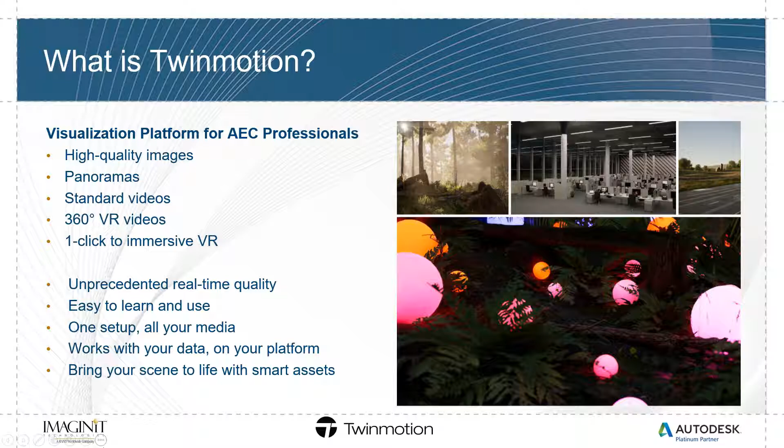This is a relatively formal presentation, but since we have an open mic, please stop at any time—we have the time to make this a little more interactive as a demonstration. Before I start the demonstration, let me show you a quick video our team put together that encapsulates a lot of the features packed inside of Twinmotion. This is the data set I'm going to use as a backdrop for the presentation.

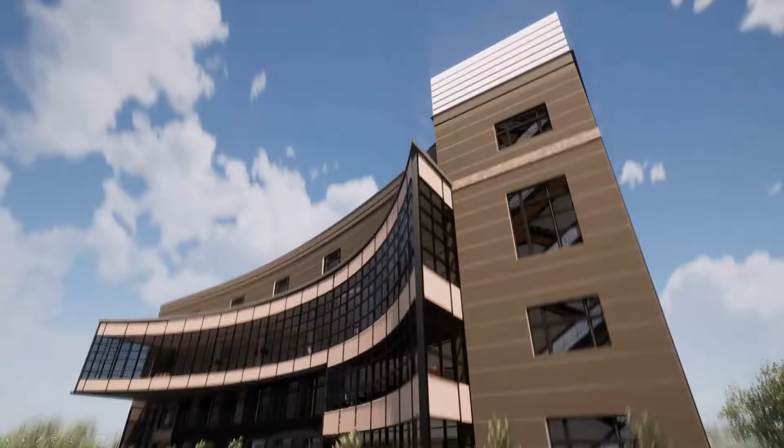Again, very easy to use. We can have animated characters here—there's an extensive library of characters, not just people, but animals and a variety of other animated features. Camera capabilities are pretty standard: panning, zooming. We have time of day settings where we can go from day to night, and there are a lot of lighting features. You can see lighting in a parking lot and around the building.

There's a lot of lighting objects included with the package. Some fun things you can see here: as we pan, there's what's called the northing offset, so you can change it and animate the moon and sun going across the sky. As we translate and move into the interior of the building, you'll see other features like particle animation—you can add smoke to this burning laptop. There's water, and we have character paths, so we can add paths not only for characters but also vehicles and custom paths.

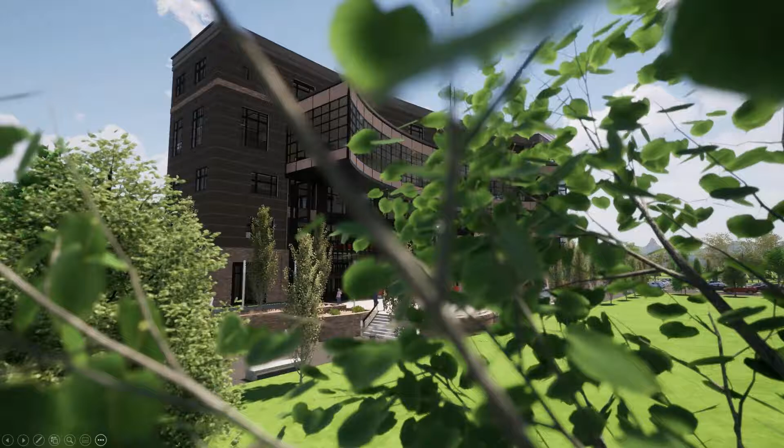And there are camera features here, like depth of field, where we can change the focal point, open up the iris. You can focus in on different things.

And then, as I talked about earlier, there's vehicle paths. You can create your own custom paths, change the seasons from summer, fall to winter, and adjust weather from a stormy, rainy day to a snowy blizzard day. As things get snowy, cars accumulate snow, and we can show the age and growth of plants and such on the site.

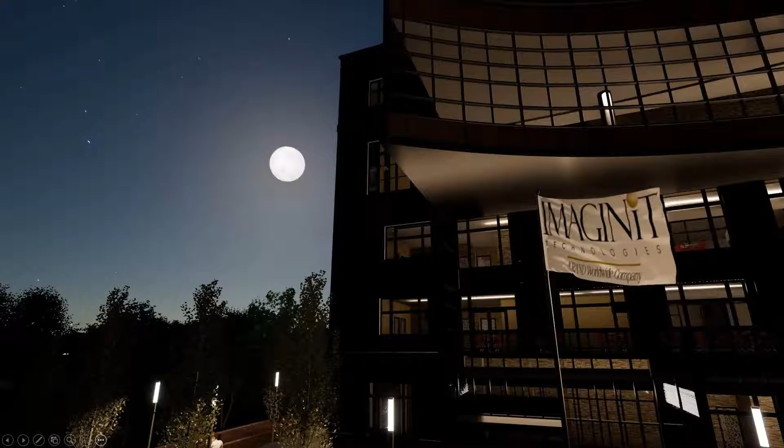Night scenes, with some more characters in there with flying birds. Nighttime scene with lights. So this is just to give you a broad stroke view of what we can do inside of Twinmotion.

So let me get out of this PowerPoint for a moment, and let's start from the beginning of opening up a Revit file. This is a Revit Users Group, so you guys are all familiar with Revit. I have the model we're using as the backdrop for the Twinmotion presentation. You can see it's a pretty basic model, fairly well vetted out with interior information, building skin, and a little bit of a simple site.

But the way we were able to extract this data out of Revit and bring it into Twinmotion is using a plugin from Twinmotion. If you look on the top with your tabs, there's a Twinmotion plugin for the various versions. I happen to be using 2020. I don't know how far back they go, maybe 18, 19, 20, and then there's a 21 version of the plugin. But it's a very simple interface.

So there are three panel buttons here. There's a See in Twinmotion, which is basically a direct link to Twinmotion, so I can quickly take this model and export it right into Twinmotion. The difference between that and doing a hard export to an FBX file, which is this button here, is that it's a one-directional way of looking at your model and vetting it out inside Twinmotion to get a sense of what your model might look like.

So what I mean is I can be in Revit, export this out into the See in Twinmotion, look at the model and the various views inside Twinmotion, then make some adjustments back into Revit, and re-export it back to Twinmotion. The only thing is that it is not a bi-directional change.

If you're wanting to add certain assets, objects, and materials, you can bring those in via FBX, and that's probably the cleanest method. Realizing that, out of Revit you can do a quick export to FBX, but it doesn't give you the broad spectrum of what you can do with the true export from the Twinmotion plugin. You can bring that FBX file right out of Revit into Twinmotion, and it will behave similar to the Twinmotion export, just not as rich. But to answer your question, yes, you can bring any FBX file into Twinmotion.

Upon deployment of Twinmotion, you're presented with this welcome screen, which gives you a quick broad stroke about how to navigate around Twinmotion. You can change your navigation mode to mimic other applications if you prefer to navigate like the Revit interface, or just keep it at Twinmotion. There's also a link right here to the Twinmotion Epic Games website so you can download plugins. Sometimes I'd caution about getting rid of this welcome screen, because if you set it to Revit mode and then wanted to go back to Twinmotion, I think you'd have to reinstall the program. A little annoying, but just a tip.

This is Jason Harwell, I don't mean to interrupt. Can you repeat that last little part there?

On the welcome screen, there's the ability to change your navigation mode to mimic Revit or SketchUp or whatever it might be. But if you kill the box and say you don't want it to pop up anymore, it'll stick on that format. It's not a game changer, but if you prefer to go back to the other navigation mode, you're kind of stuck there, and you'd probably have to reinstall the program. You can't adjust that from preferences anywhere that I've found. I could be mistaken, but I'll shelve that for now—there's probably a way around it. I generally just keep that there and quickly X out of it.

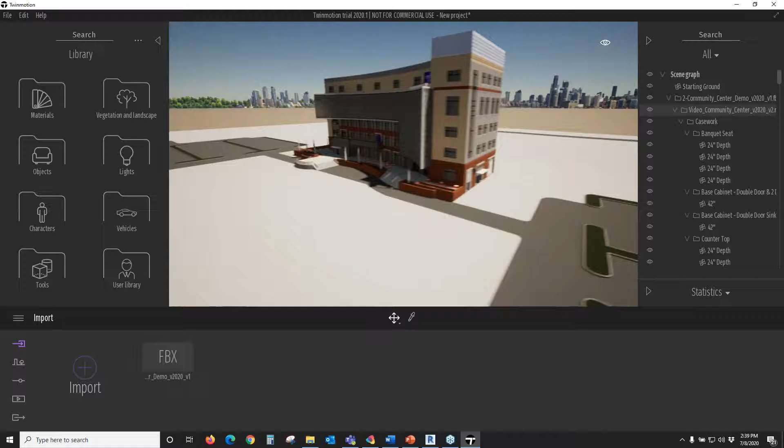So if you look at it here, it's relatively raw. There's not a whole lot going on. The materials are pretty poor, but we'll get into those in just a minute. Navigating around the model is quite simple - I'm just holding my middle mouse button to kind of pan around, I can use my wheel to zoom in, and I can hold shift and just kind of orbit around things.

And again, I can start zooming in, or I can hit my arrow and start walking inside the model here a little bit and going around things. I actually wanted to go to a specific area in this model, and I could try to navigate through this and try to find it.

But again, the easiest way for me to do this is to use my scene graph. I know there's a billiards table that I want to go to, so if I just use my search and type in 'bill' and select that, hit my F key, it takes me right to that location that I want to be in. Pretty easy. I really like this scene graph because it allows me to navigate around my model quite easily.

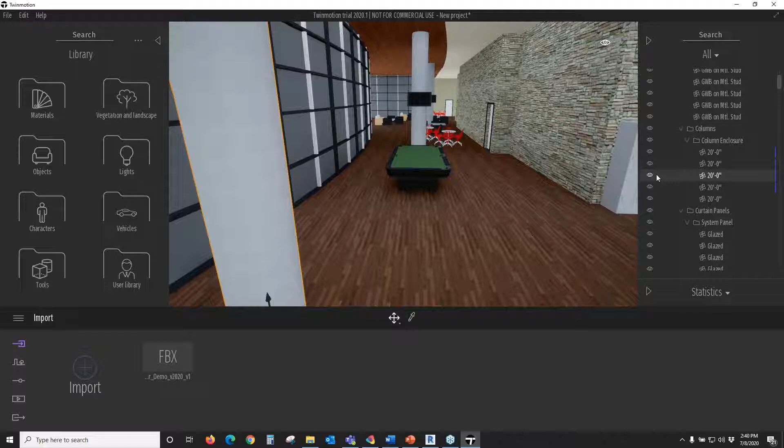That's awesome, yeah, it's very easy to use. You don't even really need to know what the object is. If I just click on it, it'll tell me inside my scene graph it's this 20-foot column, and I can turn that off right here. So again, it's just like object styles or layers. You can turn things on and off, but it's also a quick way to navigate inside your model and move to certain things.

So that scene graph you were calling it, does that work in a hierarchy, and where's it pulling that information? Is it the Revit category, Revit type, and then family, and then instance? Yes. So these are all the various... it's working exactly the same as Navisworks. Exactly.

It's good and bad in that it's very deep because there's a lot of stuff in here, but the good news is that I can search, or I can look at things by various categories here. I'll show you this as we go deeper into the demo. It doesn't matter where I'm at in my scene graph, I can always find stuff. Yeah, the search is critical and great. Oh yeah, thank you, this is wonderful, I'm using it all the time.

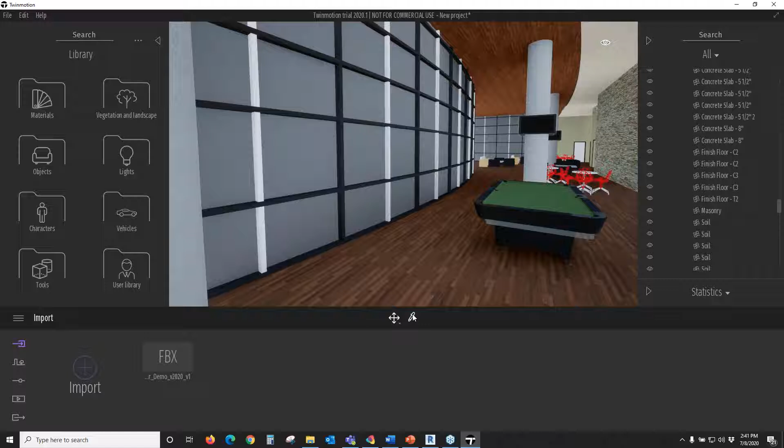It'll make more sense as I move along further. So I'm inside the scene here, and one of the first things I want to show you is how to manipulate and change materials. You can see the materials brought in from Revit are okay, they're not terrible, but I'd like to change them, especially this window. If I hit my little eyedropper here, it's my material picker, and I click on it, it tells me it's this glass, cast gray, and it tells me certain parameters about it. I can change its color, its reflectivity, its scale, and so on.

But I don't want that, so I'm going to go to my materials library and select a different kind of glass. This is the default library that comes inside Twinmotion. Again, you're not married to this, you can add to it and manipulate any of these materials on your own. But out of the box it's quite extensive and pretty deep. You can see all the various glass types in here, a lot of them have little bump maps, some are shaded and such. I'm going to try to find this tinted, dark tinted glass, select it, and just drag it on top of that material. So it's that easy to change that material from gray to something better.

It's an actual glass now, so since it's on my windows here, I have control over changing it. Maybe I want it a little darker and more opaque, you can change that. There's certain things here - this weather one's kind of cool because it'll show raindrops on your window if you have weather on. You can turn that off; I'll show you weather when we go outside a bit further. So again, very easy to add materials to the window there.

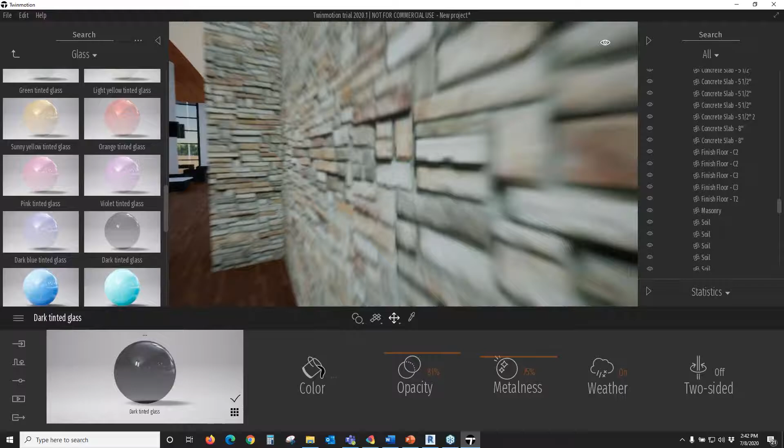If I pan over here to this wall, again this is the Revit material that was applied. It's not terribly bad, but I think we can do better - you can see it's pretty flat, it doesn't show any kind of bumping material. So let's change that. Let me use my material picker again, select the material, and it tells me it's this stone natural soldier. Let me go back and find a different stone.

Again, pretty extensive library of stuff here, so maybe this one. I'll drag that on, putting that stone on there. If you look at it, it's a little nicer now - I can see the relief in the grout from the stone. You can change the scale here, make it bigger or smaller. Quite simple, just dragging that material onto the surface makes it that easy. But one thing I really like about Twinmotion is that I can isolate the application of the material, even though this is one common wall type.

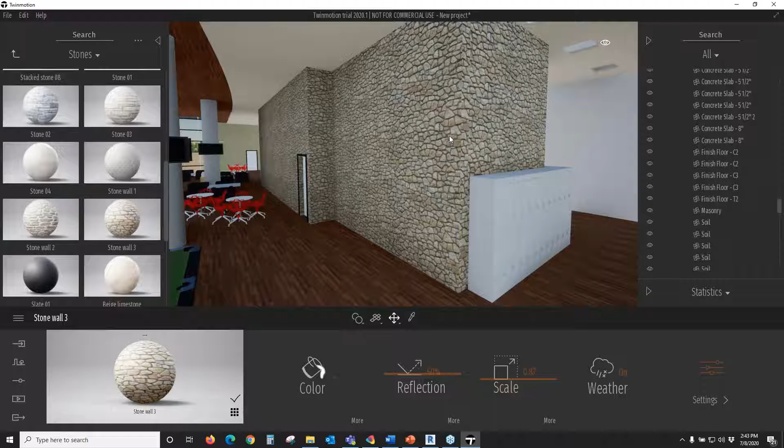I know that a lot of times you're kind of stuck with applying a material to a certain wall type because it is categorized by that. But I can isolate a piece of that wall by using apply to object. So if I want to change a piece of that wall to something else, let me find a different wall covering, maybe this plaster coating. I can just drag it onto that one wall now. So now it's not changing the material for all the objects that are the same type.

I can isolate that one wall and place that wall material just on this one wall here. I find that to be quite useful because previously on using some apps, you're always having to change its layer, its object style, and it becomes a little bit annoying to isolate certain things, when it's just easy right here. I can just pick that object and change it, making it different than the rest.

Some of the other things we can do about materials inside of Twinmotion: you can manipulate its color, maybe make this a little bit darker, change its reflectivity, adjust its scale, make it a little bit bigger, and the bump map. But one of the fun things that Twinmotion provides is this concept of grunge.

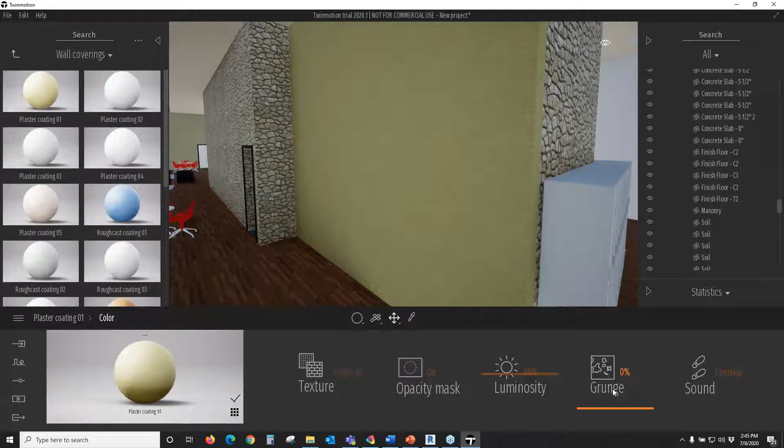If I go to more, you can see this grunge tool here. As I move my grunge up, you can start seeing that the material starts to weather or look a little bit older. So you can add more realism to your materials by showing what this is going to look like in, say, 10 years. These are kinds of things you can animate too, showing how this might look in X amount of years, the weathering of this particular material. It's just a neat, fun tool to have for your materials.

So now that we have some materials applied, you get the idea there. It's pretty simple. I can start building out this environment a little bit deeper.

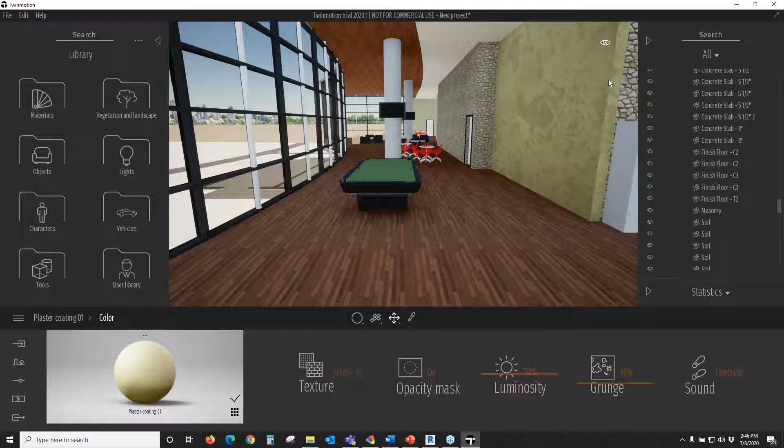If I go into my library... oh, go ahead. It looks like it moved around the corner a little bit. Is that something you can control? Right here, this corner here. Well, it just happens to be that that's just the extent of that object there. It's kind of this thick object.

I could put the same material on this wall and it will kind of blend. Is that what you're asking? I can't control that; it depends on the way the object is joined in Revit. So if you did a miter join there... right, this happens to be just kind of a butt joint there. So yeah, it's just based on the geometry. So you're correct.

Can you talk a little bit about the opacity mask feature right there? Maybe you don't necessarily have to demo it, but just talk about how that works. What we would see is, if I'm not mistaken, another image that gets mapped on top of it that we can set the opacity of. Yeah, absolutely. And then I can show you there are some other tools in here where you can set the sort and place things on top of one another—I'll show you that in just a minute. But before I get to that, I just wanted to build this scene out a little further, and I'll show you that shortly.

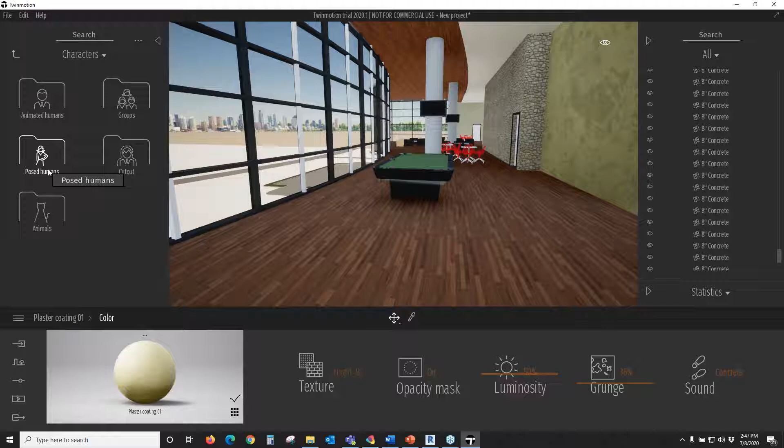So if we go back to the library, I talked about characters. There's a fairly extensive character library here: we have animated humans, groups of people, kind of posed humans which are basically like RPC people that are two-dimensional, and we have animals and some cutouts as well. In the animated human library, there's a plethora of different people that you can select and choose.

So if I want to build out my scene here, I just grab Emily and drop her into the scene. When she's in the scene, you have this little gizmo attached to her, so I can grab her and rotate her around, maybe move her over a little bit. They are animated, so I can change her from an idle to maybe drinking, maybe phoning, something like that. There are a variety of things you can do with each one of these people, and they're all kind of random.

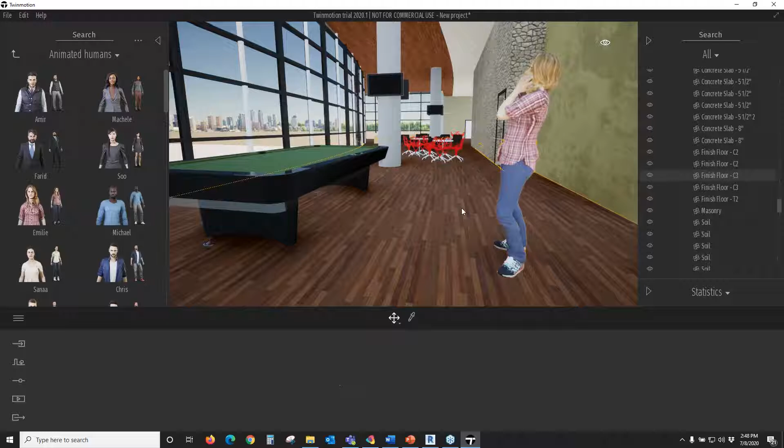So I'm gonna leave Emilie here for now. Move her out of the way.

Not only can you have individuals, you can start populating with a variety of different individual people here. I can put in groups of people as well. So if I grab these group of 3 here and drag them in, I'll put that group here, maybe rotate them a little bit. So you can see I have this group of 3. If I grab another group of 3 and place them in, you can see that it randomizes it, so it's not the same group of 3. That's a nice feature, because you obviously don't want the same group of 3 people in your scene all the time. So every time you're grabbing a variety of these different groups, it's going to randomize them and put a bunch of different people in your scene for you. Pretty simple to build out your scene by grabbing these various types of groups and people.

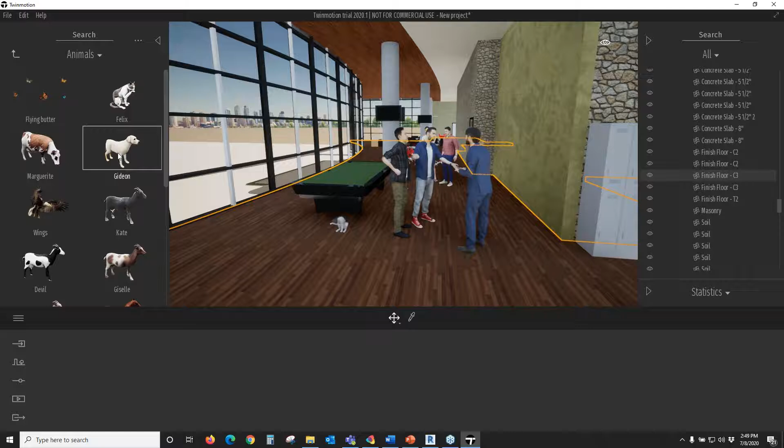Not only do you have people, but we have animals. I like Felix because I'm a cat person, so I'm gonna put Felix underneath the pool table. We've got dogs and chickens and all kinds of crazy stuff out here. Put a dog in here, maybe there's an office dog. Move him out of the way.

Again, like I said earlier, the product is very fun to use. There's a lot of interesting things you can do to build out your scene. There's butterflies, and I showed you on the video. There's birds flying in the sky. There's fish that you can add to a pond or water if you need to. So a lot of fun features here.

I talked earlier about how you can kind of mask things on one another. Twinmotion has these decals, and I'll show you how to do some of these things on the outside, but I'll grab some of these fun ones here. Maybe I'll put this hopscotch decal on the floor here. Just like a material, I can change its size, I can change its opacity. Maybe you can see through it, right? So there's things you can do about that.

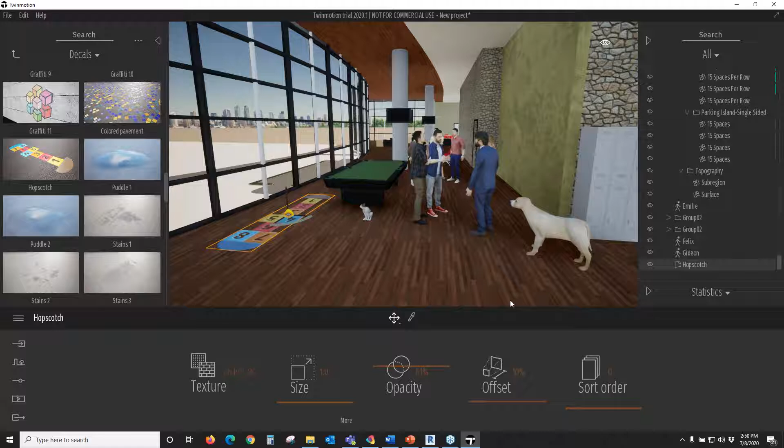This sort order will come in handy when I put something outside. I'll show you how that works, but it's basically laying one on top of another, so you can sort them by what's the priority on top of one another. I can also grab maybe this graffiti here, and again, as I'm hovering over any of these surfaces, you can see that it places it out there for you.

A question about the decals? Do those only apply to flat surfaces? Nope, I can put it around that round column. I mean, it kind of truncates it a little bit, but it doesn't have to be flat. Yeah, it does a little strange thing here, it just kind of didn't wrap it really, it just placed it on that base of that round surface there. It looks like it's on a per-polygon or per-face basis. Yeah, it's kind of a yes/no answer.

So decals are very handy because rather than build out a lot of geometry, I'll show you in a parking lot, you can do the parking striping. You could do that in Revit, you can do it here as well. It really depends on how you want to manage your model and how you want to animate that. So decals, pretty simple. Just like any other object or material, you can change its opacity. You can layer them on top of one another, and again, you can change its sort order.

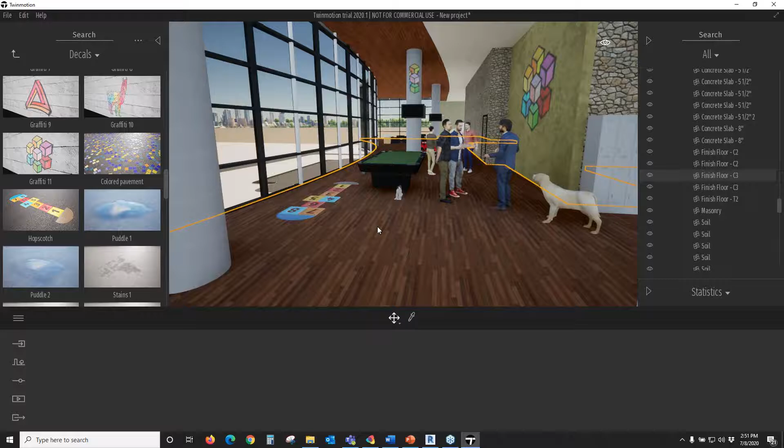Do all of these things you're adding, like decals and character animations, show up in your search, or what did you call this thing on the right here? Yeah, so if I go to decals, as I place them out there, it'll tell me I can manipulate my hopscotch. So anything I add as an asset to my scene, it adds it to my scene graph. This is how I can actually just turn these things off. It can be placed there, but I can turn it off and on, so it's easy to manage those objects inside of Twinmotion.

And how do we adjust the layer stack of those decals again?

I'm sorry, say that again? How do we adjust the stacking order of those decals again? Yes, so in this hopscotch there's a sort order.

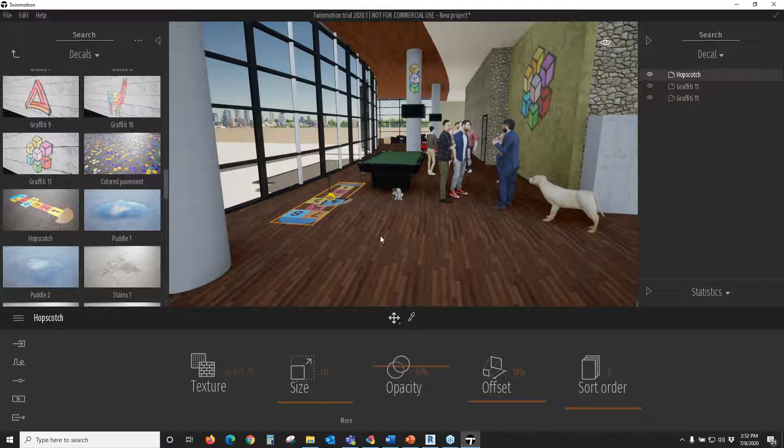I'll show you when I go outside, I'm going to place some things outside and show you how that lays on top of one another. But I can do it right here. I'm going to grab this pavement, this funky colored pavement. You can see it's below the hopscotch decal, but if I change its sort order to 1, it moves on top. So you can change that sort order.

Great, so, yeah, pretty. Oh shoot! I didn't mean to do that. Deleted my floor.

Maybe it's better to do it here. Delete. See how easy that scene graph comes in handy? And by the way, there is an undo, so you can undo if you did something by mistake, like I did by deleting the floor.

How many steps of undo do we get by default, and can that be... I think it's to your last save. So if I save this now, it's gonna kind of refresh it all.

Okay, so moving along here. So we have objects, we have decals, we have people, we have animals. We can also add other things here. Let's go to, maybe I can put a laptop out here.

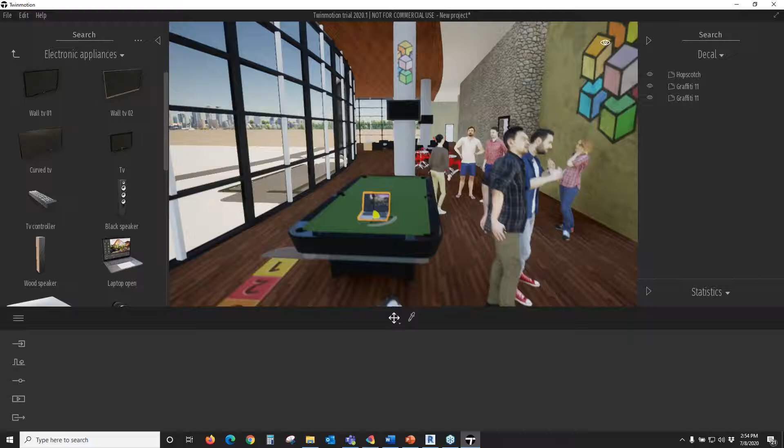In the video you saw that, so we have a laptop here. There are things like I showed you in the video, there are particles, so there's a variety of different things here. There's fire and smoke, you can put this smoke on this laptop so it's kind of burning. So there's a lot of particle kind of animations. There's water, there's colored smoke.

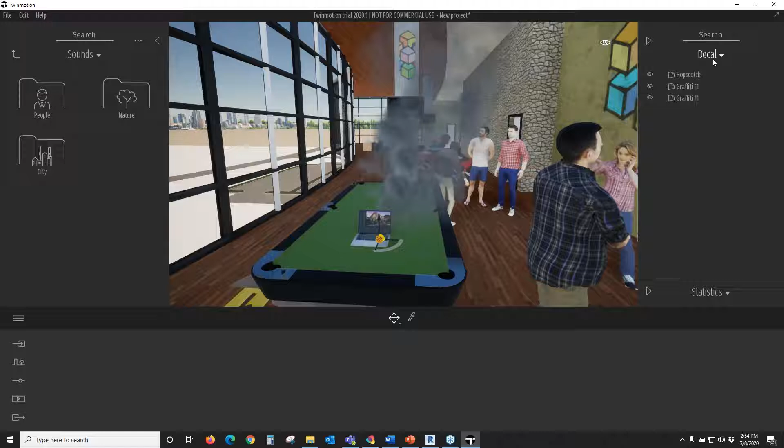Additionally, there's sound, so you can add people sound. Like this, you can't hear it here, but you can add certain kinds of sound, noises like these people are kind of conversing, so sort of like white noise in the background. So you can add a lot of texture to your presentation. That smoke is a particle, so that's a little annoying for me right now, so I'm just going to go ahead and turn it off.

Going back to some of the other objects that we can add in here, let me go to Office and maybe some tables. So I can grab this table, I can bring it in. Again, it's very easy, it's just drag and drop into your scene, very simple.

Maybe I want to add a chair, so I grab this chair, drag it in here. In order for me to copy something, I have the gizmo, I can rotate, move it to make a copy. I could certainly drop another chair in here, but I can copy this by holding my shift key down and dragging over. So now I have an instance or a copy of it.

Some of the other things that you can do with these objects is you can move things, you can scale, you can rotate by using these commands here rather than the gizmo. Additionally, if you need to do something very precise, you can transform things.

So let me get out of this and go to all. If I click on this chair, there are certain things about its position that it's telling me. So if I wanted to precisely move something about this chair, maybe move that to 17, you can start nudging the object a little bit more precisely than eyeballing it here, if that makes sense.

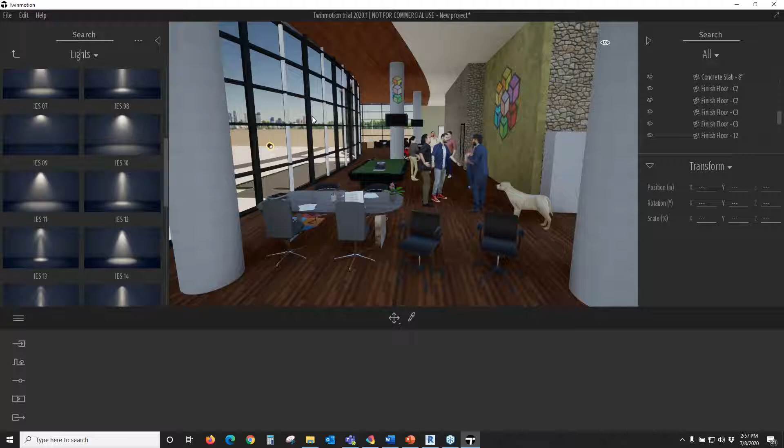I don't know, maybe this one. So I'm going to just put it up here, and once it's placed, you have the ability to change its angle. Maybe I want it to be a little more focused, change its attenuation.

Something like that, I don't know. Change its intensity, move this a little bit over here so it's on the pool table. You can kind of see that shining here.

What really makes this come to life a little bit better is if I go to my eyeball, I can change the time of day, maybe make this night. I can see that light kind of coming alive there a little bit. It's incredibly intense, but you can see how that adds a little bit more texture to your scene.

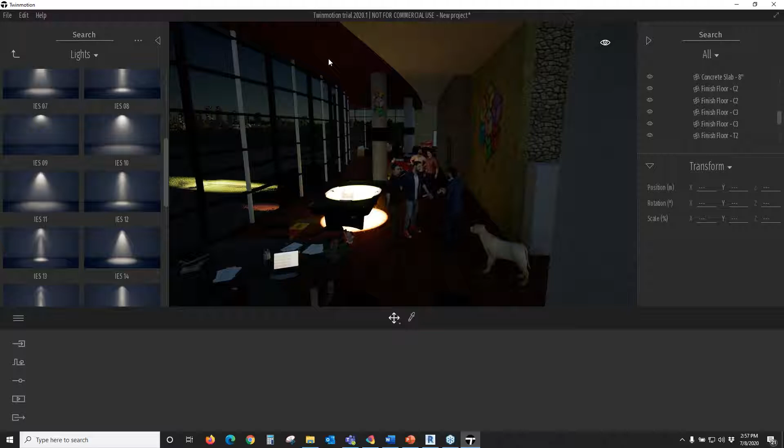I can add another one here, change its angle, and its attenuation, maybe something like that. Right now I have the shadows off, but I can turn the shadows on, and just kind of see the shadows now.

If I go back to my lighting again, this is how I can filter what I want to see. You can see the gizmo for this light is highlighted, but I can go back to the other one, and again change and turn its shadow on. So I have controls over here.

So by the way, these gizmos, these helpers, gizmo helpers, are important for you to manipulate and move the objects. I personally, when I'm working in my scene, don't like to see them, but I know I can always go back to them by just clicking on it, and it highlights that object for me.

But if you always like to have them on, you can go to your preferences and go to appearance, and they're called visual helpers. If I click on this and have visual helpers always on, they're always going to be on in your scene. It's a personal preference, but if you like to have them on at all times, you can. They don't render, but they're there for you so that when you're wanting to manipulate and edit these things, they're always here. For me, I just like to have them off because I know I can always go back to them from my scene graph.

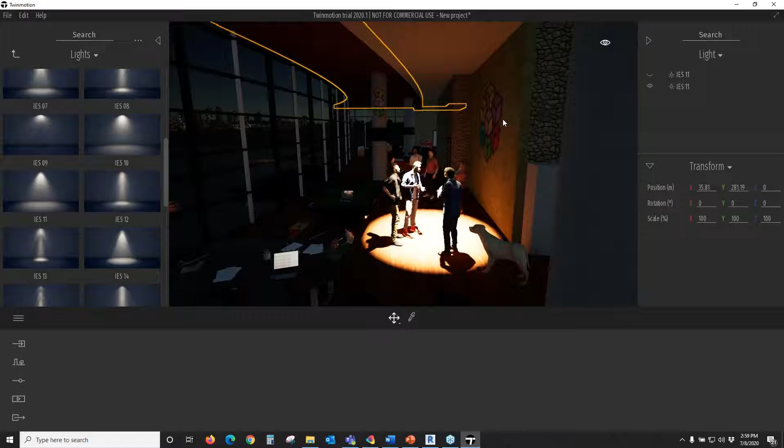Another way to get them back on is by hitting your G key. You hit your G key, they all kind of show up, so now I have the gizmos for all my objects in here. I can hit the G key again and they go away. So just as I showed you with how to import things, there are many ways you can turn all your key features on and off very quickly.

Let's turn this back to a little bit of time of day so we're a little brighter in here. So I will pause here for a second.

Any further questions? I have a question about the lights, this is Bethany. If we had a light that was in the Revit model, and if it had IES data in the light family, would it function the same way as these light objects added through Twinmotion, with all of these options you're showing us, or do they have to be Twinmotion lights to have all of those options? Yeah, unfortunately, they will not come over from Revit. So you'll have to add the light features from Twinmotion into those, even though you had an IES light from Revit. So you're going to actually have to add them in Twinmotion, unfortunately.

There are some other light objects that are loaded with the product. They're not as precise as these IES lights, but there are street lamps and various bollard lights, there's a library full of them. If I go to, oh gosh, like street lights, you can see there's a variety of different lights here, but they're not accurate lights, is what I'm saying. But yeah, to answer your question, no, those lights from Revit do not translate over to Twinmotion.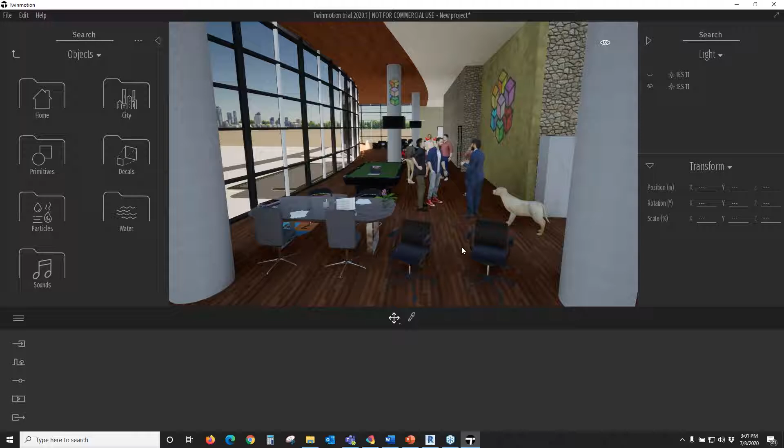No, it's okay, I'm just trying to get a sense of what the workflow would be, because the other question I have is, once you bring in a Revit model, and let's say we do all of this work in Twinmotion modifying materials or adding lights and other entourage elements, if we needed to update the Revit model and brought it in again, do we have to redo that work all over again, or does it have any kind of smart ability to kind of...

Right now there's not a good way to update that model that you're manipulating. I know exactly what you're saying, because I spent a lot of time on that animation where I was building it out and going, oh gosh, I need to add this. And I spent all this time doing materials and all that.

I don't want to say it's a no, but right now I don't see an easy way to do that. I'll research a little further and see if I can find a better answer for you. But unfortunately, you do all your work, and if you wanted to go back to your Revit model and massage it a little bit, it's kind of annoying.

That's why I was talking about this feature called Sync in Twinmotion. This is a great way for you to vet things out before you go full-blown FBX. It's handy for working back and forth between Twinmotion and the model to get a sense of what you really need to do. Once you're comfortable and at a good stopping point with your Revit model, then export it to the FBX file.

One quick question about Sync in Twinmotion: is that an additional plugin that one has to install into Revit, or if you have Twinmotion on your machine, does Revit recognize it? It's part of the Twinmotion plugin, so once you install the plugin, it's included. I'll show you that when we get done here. It's pretty simple, pretty slick.

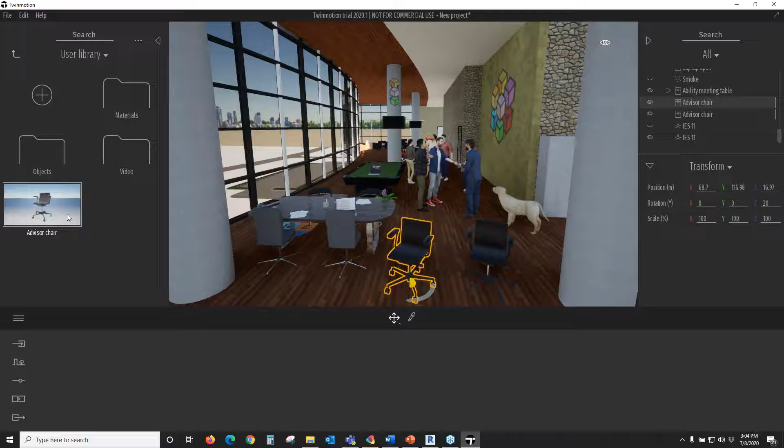For instance, if I wanted to grab this chair and make it part of my library so I can use it for different projects down the road, I just click on the chair and hit these three dots. You can say add to library, and it automatically adds that object to your user library. This library carries over across all your different projects, so you can make a custom library of objects and customized materials, and they're all transferable between any projects you bring into Twinmotion. It's very handy to have, so you might use this chair in a different Revit model down the road.

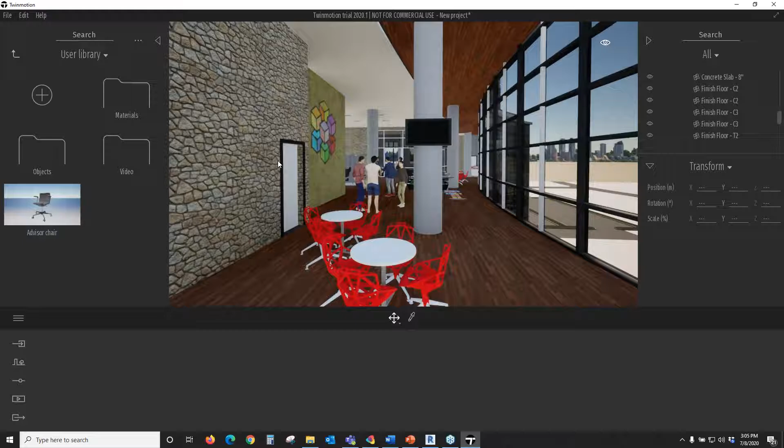Moving around the model is real simple. I can start walking through this. I'll turn my speed down to 1, which is walking mode, and you can walk through to get a sense of your space. I'm just holding down my arrow key on the keyboard with 1 selected. If I put 2, it speeds up — that's called bicycle speed. So you can easily walk through your space and look at what's going on very fast. Walkthroughs in Twinmotion are pretty simple.

Let's go outside and work on some of the stuff out here, showing some of the landscaping we can do. When I brought this model in, the exterior was pretty generic and raw. These trees here are RPC trees, so they don't come over very well. But what we can do quickly is transform those into Twinmotion trees. If I select one, you can see it's this Italian cypress.

So what I want to do is grab all of them. Just like anything else, you hold shift and select to get all those trees. I'm going to select all of them and replace those objects. I go to my user library and pick some trees — I'll replace them with maybe this Lombardy poplar. Now that they're selected, I go ahead and replace them. It's pretty simple.

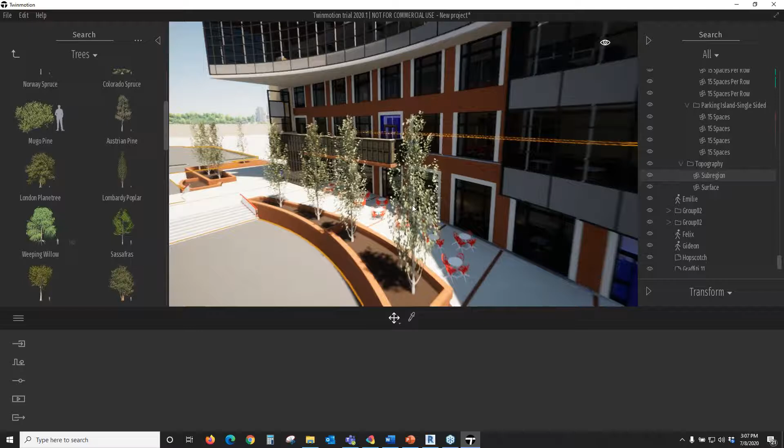So you can see that they're pretty big. I can change the age of those and bring those down to something that's a little bit more reasonable. And those look a whole lot nicer now. They're not the funky little RPC trees. Now they actually have leaves on them. And you can see that if I had a little bit of wind, you can see them kind of fluttering there in the wind. So it's a much more realistic kind of looking tree inside my scene here.

Some of the other tools that I have, let me manipulate over to this planter bed and get in a little closer. So oftentimes I can drag and drop trees into my scene like this. Pretty simple. I can just do one by one, or I can grab a whole bunch and kind of place them in there.

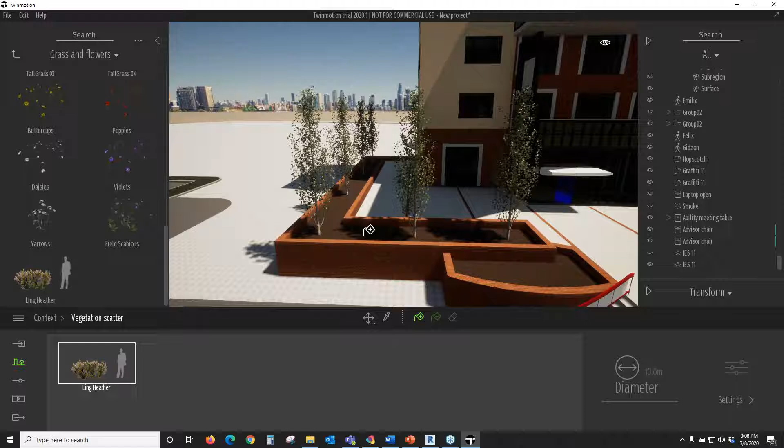One of the things that we can do is what's called a vegetation scatter. So if I go to vegetation scatter, I'm going to grab some vegetation. I grab this ling heather, put that into my drop area here, select it, and paint this object here. You can see how quickly that painted that object. You can see that it bled over a little bit just because of the scale of that object, but I can go in here and erase that. Let me change my eraser down a little bit smaller, something like that. Now I can just hover over this and clean that up. But the idea here is I can quickly build out this flower bed very quickly by doing that vegetation scatter. So it's pretty simple, pretty fast.

One thing I truly don't like about this ground here is that it's not very pleasing to look at, so I'm going to go ahead and change that as well. I'm going to use my material picker, pick that material that's in by default, this funky little ground here, but put in a ground covering, some grass. So that feels a whole lot better now. It was that easy for me to just change that grass. Again, just like any other material, I can change its scale and such. I'll just leave it the way it is for now.

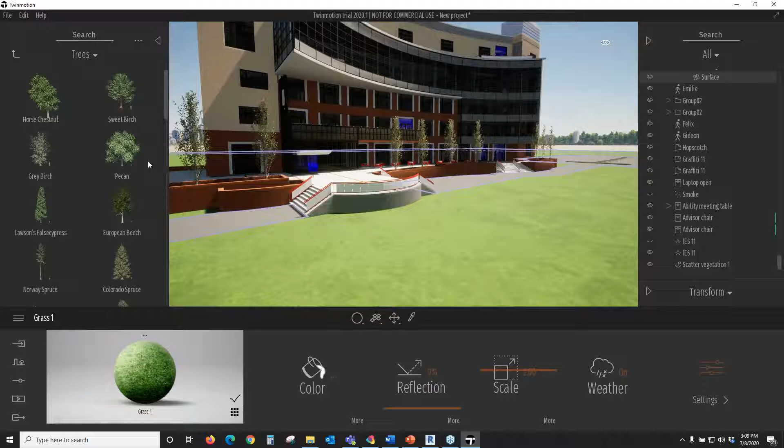If I go back to dropping in some more trees here, I can just drag and drop. Every time I drag an instance, just like people, it's slightly different. This tree is slightly different than this one. And again, one of the things that we can do here is change its age, maybe make it a very immature tree, something like that.

Question for you: I know in 3ds Max, when you're placing trees through that program, it has an option of a minimum maximum age, so not only are you getting variation in the style, but you're also getting variation in height. Is there something like that here?

I don't know if it's random. I can show you, in fact it's a good segue into the next thing, I can paint the forestation of my site here. And just like people, it's random. The trees are not all uniform. So to answer your question, yeah, it does kind of randomly place trees at various stages of growth and size and things of that nature.

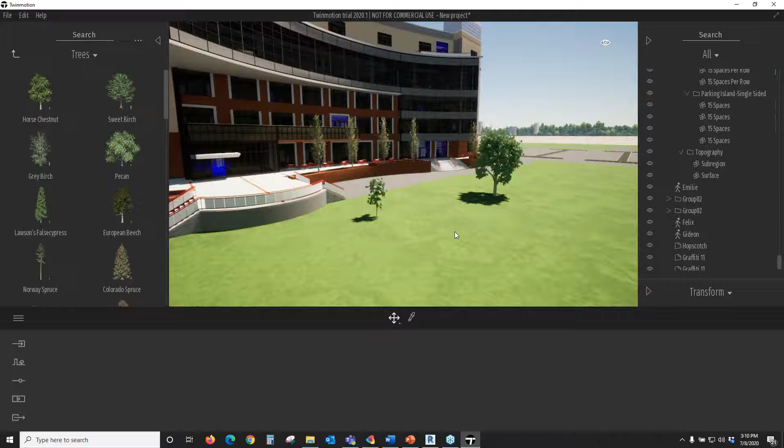So in fact, let me show you that very quickly. If I go to this vegetation paint, I'm going to grab a bunch of trees, different kinds of trees here, and just put them into my library. I'm dragging and dropping them, just putting them into my dock here.

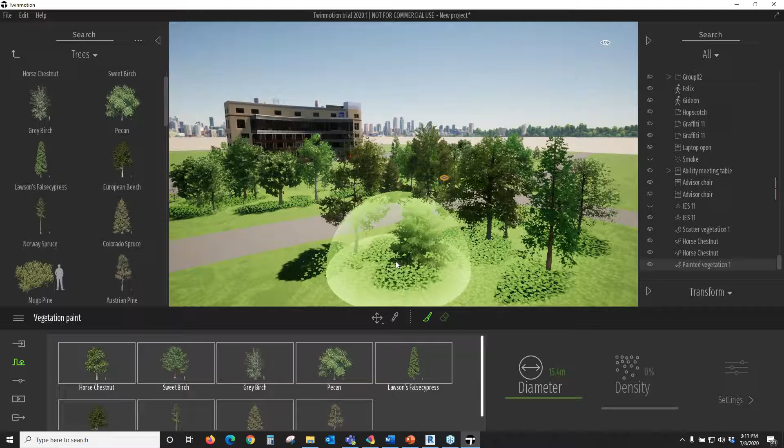So now what I want to do is paint. When I get my paint brush, you can see it selected all the trees, but I'm going to make my bubble a little bit bigger and zoom out a little bit further, make that even a little bit bigger. So now if I just paint in here, it's randomly placing all these different kinds of tree types that I've selected. I'm not having to manually select and pick what trees are going where, it's doing it for me. So it's pretty cool, pretty easy. Rather than me dragging and dropping individual trees and changing its size one by one, maybe I put another one here and change its size.

It's kind of randomly doing it on its own here. So, again, it's just a nice quick tool for me to add texture to this scene very, very quickly.

Looks like when you painted, that all shows up as one object. Yes, because it's this painted object. So it's good and bad—good because it segregates out these individual ones, but once I delete them, they're all gone.

Can you adjust the constraints on the randomness? I don't think so. It's just its own internal engine and how it's randomly placing those kinds of things out there.

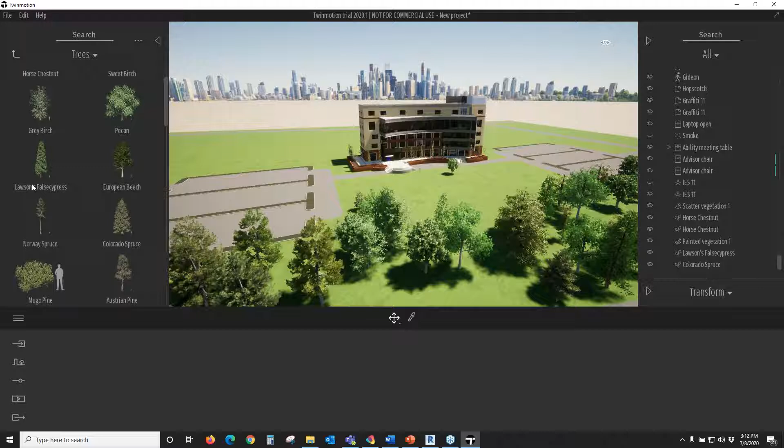Can you save where you put them down in the tray, like the collection of different ones you wanted it to randomly place around, so you could do the same collection again later? No, other than just clicking on it here—there's my selection, there's my tree set—and then I can start painting again. But if you deleted it, it would be gone.

Yeah, but I can come in here in this selection set. Let me select this, and I can delete this tree from the selection set so that when I erase—or let me take that back—I can remove that tree from the whole selection set. So you can see now as I'm selecting these, they're removing from my painted selection set.

And then I can go ahead and add something back in, something different, and you can see it's adding them back in again. So you do have control, as long as that painted selection set is still here, over removing certain trees and replacing them with others. Because every time I select that painted tree object, it's going to give me what that selection set was. So you do have control over it.

Okay, thanks. And again, just like anything else in your scene graph, I can turn them off or turn them on, just like layers and object styles—you can control them. As I talked about earlier, some of these things I don't particularly care about; I want to merge this into something a little bit more conducive to this site here.

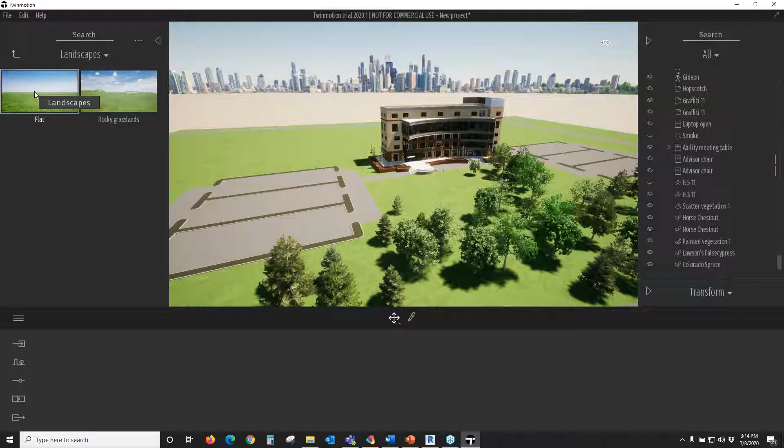So let me go back to my library and change the landscape to a flat grassy plain rather than this default brick. As that loads in, you can see it'll look a little bit better because it gets rid of this brownish gray. Now it feels a little bit better.

Now I'm kind of in the wilderness, although I'd like to change my background because it's currently a cityscape. I can change that by going into my background settings—by default you're loaded with various types here. I'm going to select this mountain, so now I have a site that's a little bit more in context with what I want: some mountains and a grassy plain area.

Also, let me go back—you can geographically pick a location anywhere in the world. If you wanted to, say I'm out in the California area, you can select that as your geographical location, and it'll reflect more accurate sun, time, and setting. So you can select your geographical location.

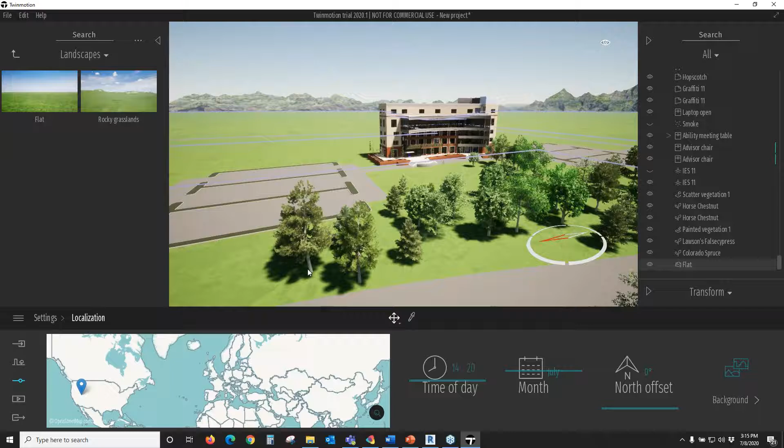Some other things we can do here—I wanted to show you that decal feature, which is kind of interesting. Let me zoom in a little closer. So we talked about having that sort feature. Let me go back to decals and put in this zebra crossing.

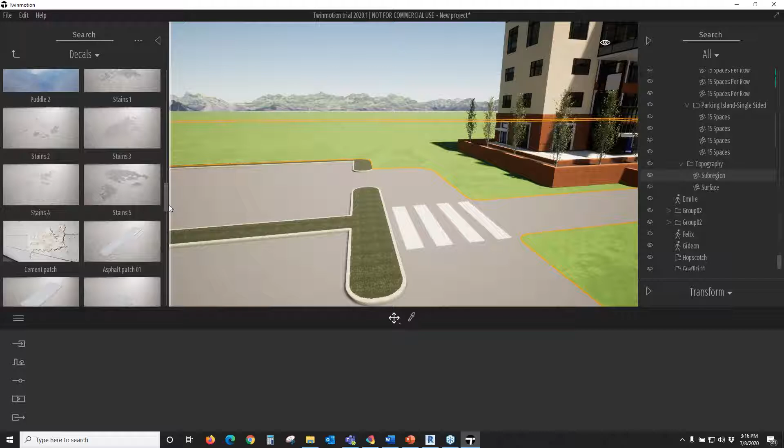And adjust its size—something like that. And then let's also grab one of these puddles, maybe this puddle here. As I'm dragging this puddle onto my scene, I really want that puddle to be on top, so I'm going to move its sort order up. Now it's sitting on top of the painted stripes here.

And one of the interesting features about these decals is that if I were to change the weather here, let's change the weather to a rainy day.

You can see there's rain coming down. The material for this asphalt is what's called weathers on, so it's showing kind of puddling.

If I select this asphalt and turn weather off, you can see that it doesn't show the puddling of the water on the ground here.

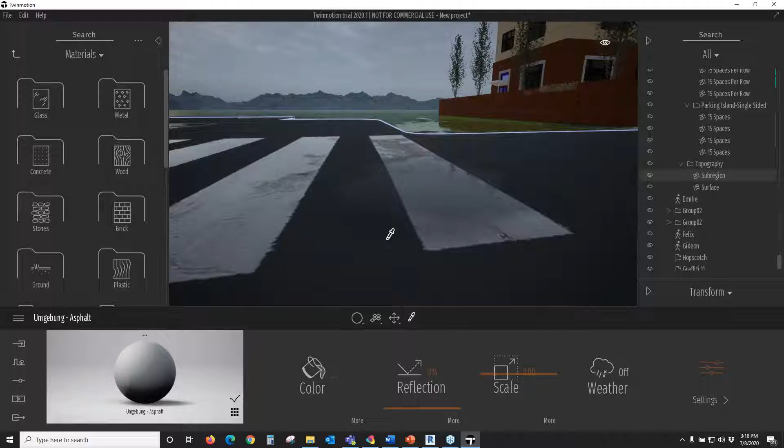But what I wanted to show you is that even this puddle that I placed inside of the model, you can see it's showing the raindrops hitting it. So it's relatively realistic. I put that decal on top of this asphalt and this walk stripe, and it's still showing the weathering of the puddle with the raindrops falling on it.

So very cool stuff. Again, I can select that asphalt and turn the weather back on, and now it kind of shows the water ponding and puddling on top of the asphalt surface there. Very cool stuff.

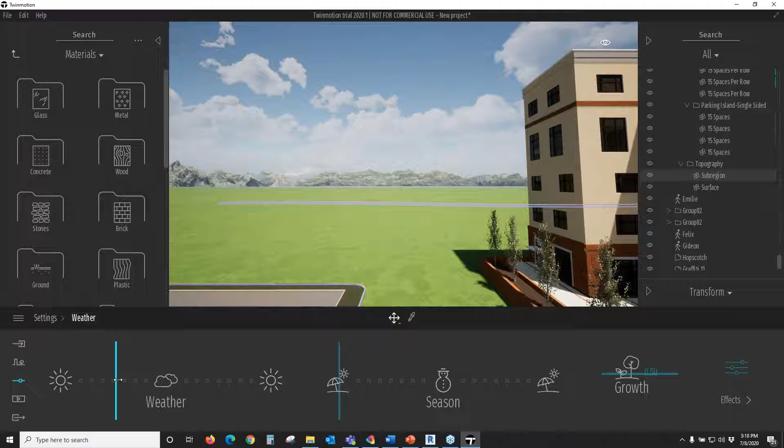Back to weather, and then let's turn this on. That's a good segue into how you can change the weather here. I can go from a sunny day, no clouds, to a cloudy day, and then it gets a little darker, and then full on rainy day.

Similarly, let's go over to the trees. This makes a little more sense when you can see the trees.

I can also change the seasons here. So I can go from summer, and I can start to gradually get into fall. You can see the colors on the trees change and get deeper into the season. And then I get into winter, and now there's snow on the ground, and the trees have lost their leaves if they're the types of trees that do that.

And then as I change the weather, since it's winter, the rain's going to turn to snow. And what's kind of cool about this is that even though I've got snow falling here, there are some effects I can add.

I can add this fog. So I add fog, and now it really starts to look like a blizzard. By turning up that fog, you can see the background kind of gets faded out a little bit, and you can see the snowflakes falling. So a lot of very interesting effects you can add to your model very easily and very quickly.

Let me bring this back to a happy summertime.

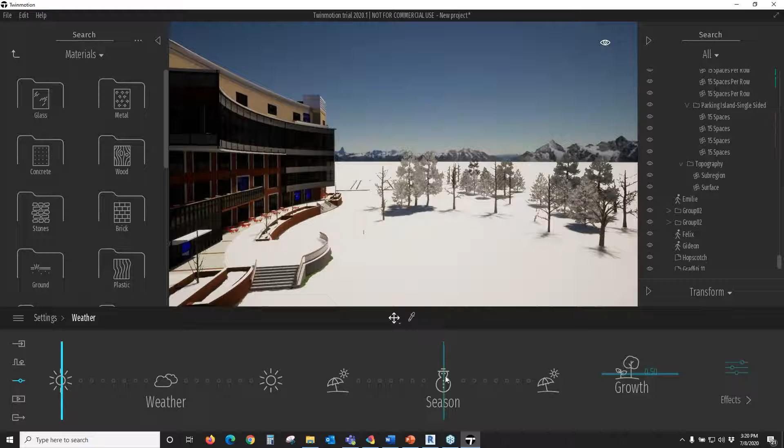Quick question for you. Just to touch back on placing vegetation and all the various effects that can be achieved with the vegetation you place. We'll be working with some landscape architecture clients, and they have very specific needs as far as species. I'm sure we can import custom species models, but to what extent will they be able to receive those types of effects and respond to wind?

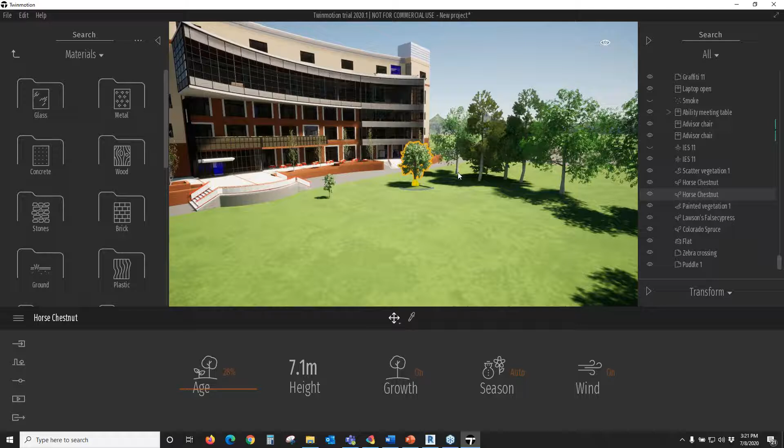They should respond exactly as these do, as long as they were brought in basically as an FBX file. Then you can add those assets just like I did to my custom library. Once you import that object, you can bring in trees from a resource I can get the name of for you. There are resources where you can bring in a whole bunch of different kinds of objects, and trees is one of them, brought in as an FBX into the scene. Then I can save them off as my own individual assets and objects, and they should behave just like these.

Are there any file parameters or special data settings we have to set up for our own custom tree models if we can't find the species in the libraries? I can send you a list of file types if that's helpful, in case you're doing things outside of Revit, like Maya or 3D Studio Max. Typically the foundation is an FBX file, but there are other formats you can import. I can get you that list of file formats, no problem.

Okay, thanks. Quick question: with the weather and the wind, can that affect fabrics and the trees, and do the leaves blow in the wind and stuff? Oh yeah, in fact, while I'm there, I can kind of show you.

Flags. Put this beast here. You can see it's kind of waffling in the wind there. Let me show you how that affects things.

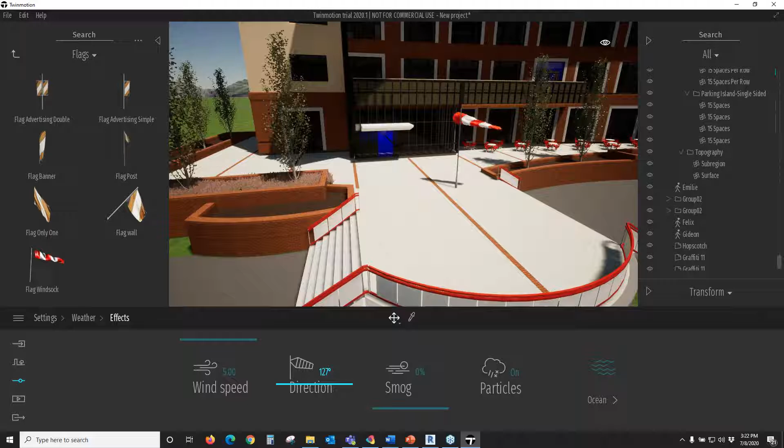If I go to weather effects and wind speed, I turn that wind speed way up, maybe change its direction. Now you can see with the wind speed, with these leaves, it's impressive. I can bring that wind speed to 0 and they don't move, or very, very light, just kind of waffling in the wind, or very busy. So the leaves, these flags, absolutely all are affected by these various effects. Smog, obviously if you have water features, there are things within water that we can do, show the wind will affect how the water ripples across the water there.

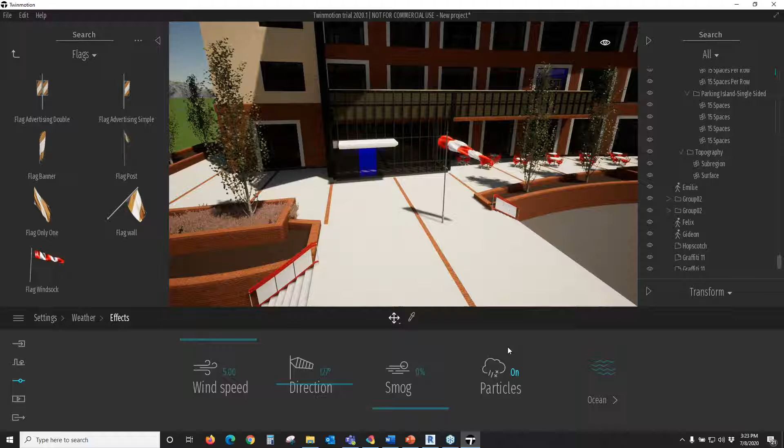So let me show you a couple other quick fun things we can do in here. One of the things that's kind of fun is what are called character paths or vehicle paths. If I add a character path, I'm going to just add something randomly here, some characters kind of walking to or from the building. So there's my character path, and you can start seeing people kind of walking here.

Maybe I'll change its density up a little bit more, and then change its width. What I can do here is maybe I'll be down here. And you can kind of see people very happy because they're leaving work. I can reverse that, maybe they're going into work now, they're sad.

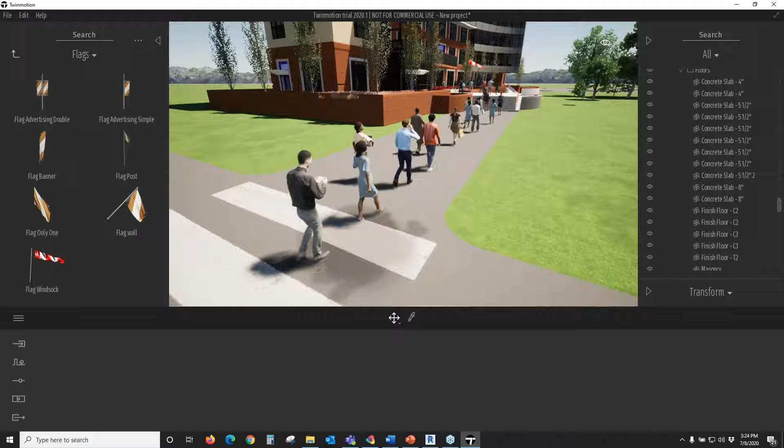Yeah, we can certainly add these character paths. Like I said, these are all animatable, if that's a word, so that in your animation, as these people are walking in and out, you can show egress of certain buildings, exit paths. You can show all that kind of fun stuff using these character paths. You can use custom paths, you can animate - there are vehicle paths here as well, there's bike path, and then there's these custom paths. You can add your own kind of funky things if you want to animate certain things, but vehicle paths, as you saw in the animation, as cars are coming and going. So very, very fun kind of stuff that you can do here.

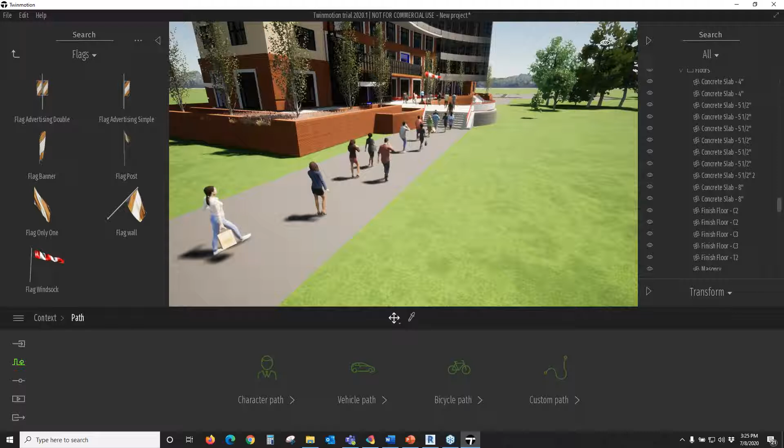Very quickly, one of the nice features about Twinmotion is, just like websites, you can bookmark things or scenes inside of your model here. Let me go back to that billiards table, for instance. I'm going to go back here, hit my F key. So I'm back to this billiards table location where I was building stuff out. If this was something I wanted to bookmark as a placeholder, where I want to keep going back to for whatever reason, it's something that's important to me.

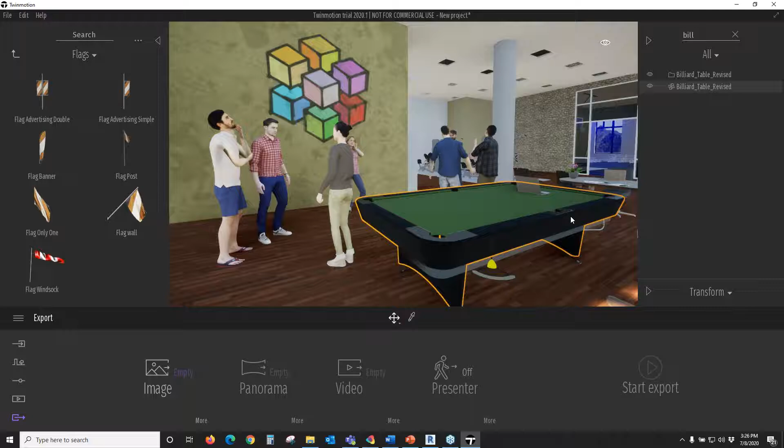I can come to my media command here and go to image and save that as an image. Not only is this an image where this is what I can render, but this is basically a bookmark. So if I'm back out here fussing with other things - let me get out of media mode - and I'm doing other things outside, I can always go to this scene very quickly. So it acts like a bookmark, but it's also an image that you can use when you're ready to export this image as a still. Very, very easy for you to bookmark certain areas within your model. Rather than trying to get - I use this billiards table as my point of reference inside the model - I can easily navigate to it, but you can also save it as an image, and save a variety of these bookmarks so that you can navigate your model very quickly.

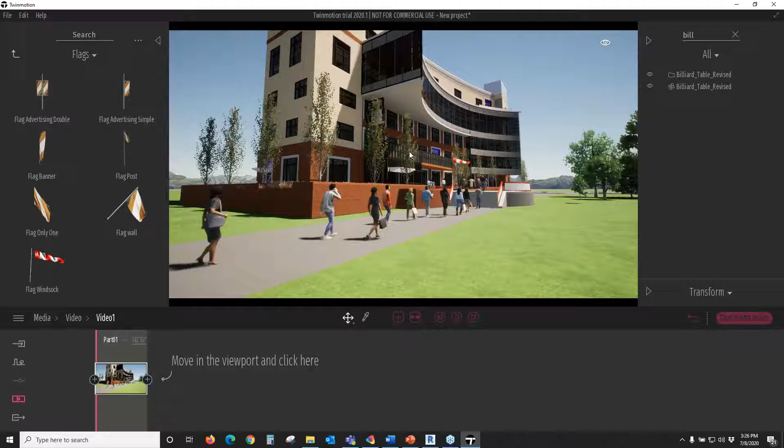With that said, I can create animations very easily as well. It's really quite simple. If I'm maybe down here looking at the building, and I want to go to my video, I'm going to create a video. This is actually my first keyframe. I'm going to navigate maybe over here, and another keyframe, and then my third keyframe, I'm going to look up here.

Something like that, and then I'll add my third keyframe. So now I've created an animation - that fast. Granted, this is pretty simplistic, but you can see it's so fast for me to create something to share with a customer.

I can easily create these images like I did as bookmarks, or create a quick animation and export them very quickly. The animation I showed you at the beginning of the presentation was a 2.5-minute video that was fairly well vetted out with a lot going on. Now I'm just using a laptop - not high-end, not bad either, I'll show you the specs in a minute - but that probably took me 30 minutes to render that whole 2.5-minute video.

So it's very easy for me to create these animations and images very quickly.

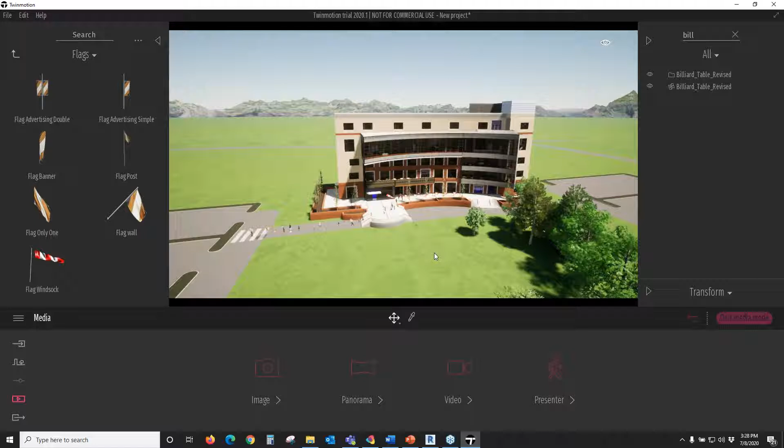One of the other things I talked about earlier was this concept of presenter mode. I'll show you a finished presenter mode, but basically what it gives you is a way to share this information with a client who doesn't have Twinmotion. It takes this model, any images or videos you produce, and packages it into one huge executable file you can share, so they can look at this model as if they had Twinmotion themselves.

That's a very nice feature, and it's full VR too. If they have VR appliances, they can plug them in and use it as if they were walking through the model with their VR tools. Very, very easy.

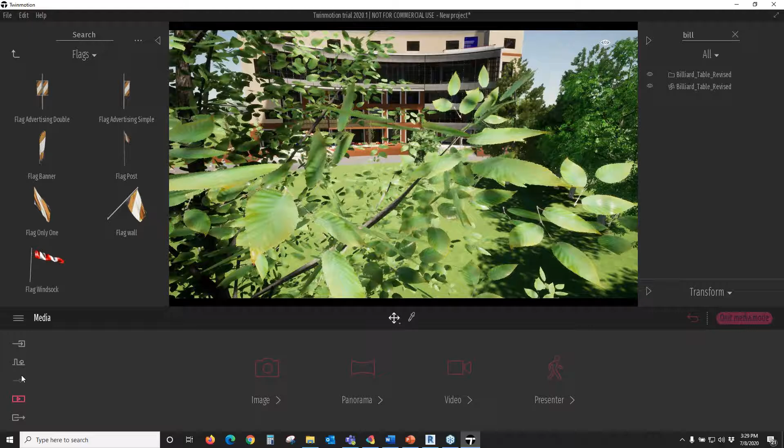One last thing - let me see if I can navigate a little cleaner here. It takes a little fussing, but if I navigate into these leaves here... let me get on this, oh by the way, I'll go back to that in a minute.

I have some camera settings here, and I showed you earlier that depth of field. If I turn this on and mess with it a little, I can change the depth - you can now see these leaves in the foreground are out of focus while the background is in focus. There are a lot of nice camera tools here you can fuss with, like changing the aperture, maybe opening it up so everything's in focus.

Again, these are all animatable - there's my made-up word again - but there are a lot of neat features here.

What I wanted to speak about was these images here. You'll notice that as I click on the image, it goes into what's called a media mode, meaning I can independently manipulate this scene outside of my standard scene graph. My scene graph controls its lighting, its time of day, whatever - but if I select this individual image, I can change it independent of my master scene graph.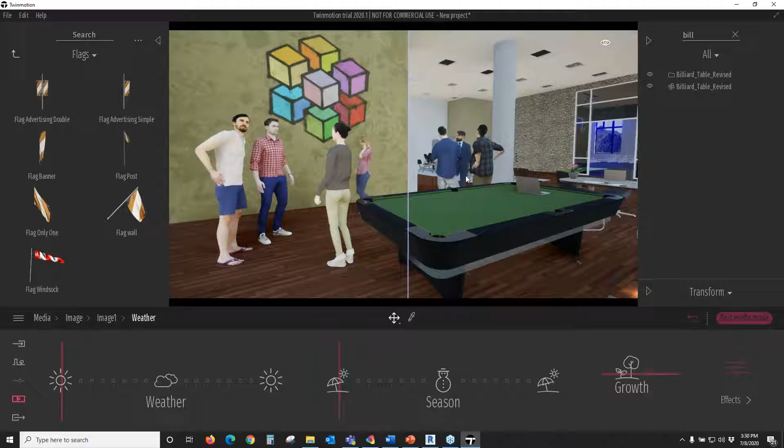Something that's probably more relevant is maybe changing the... gosh, hang on, what am I doing here? I wanted to... I'm losing my mind here a little bit.

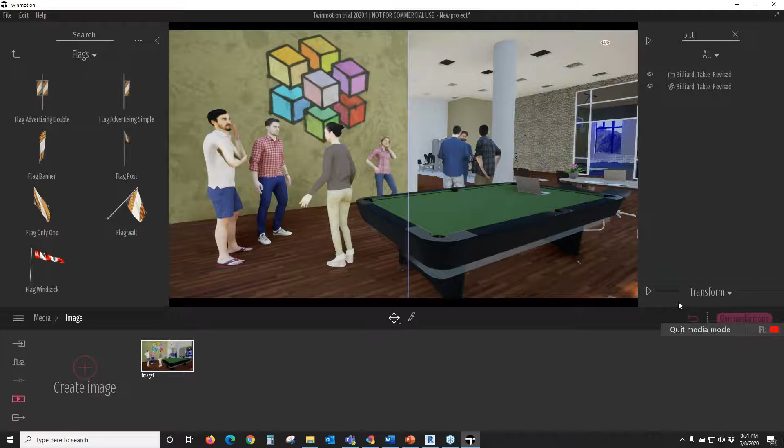My point was that you can manipulate this image, change its settings - maybe the time of day, maybe weather settings - and they are specific to this bookmark image, not affecting your master scene out here. That's how you manipulate your videos, changing from night to day or fall to winter, by changing these bookmarks as opposed to your master scene.

So again, those are easily manipulatable, and you can fuss with those a little bit.

So that was basically a quick overview of how we can use Twinmotion. What I did want to show you very quickly was that presenter file. Let me get out of this - unless, do you have any other questions before I exit out?

Actually, I do have one question.

If we wanted to bring in another file, like another FBX of a different building, or if we had a site model that was a separate file, and we wanted to put together multiple different files, how can we position them correctly in the world, or relative to one another?

So it's a tricky question. I know if you're using a bunch of linked Revit files, generally they're kind of superimposed on one another correctly. So if you bring in that one Revit file, this file here is actually two files: it's the site plan with the model as a linked file, so they reference together perfectly inside of Twinmotion.

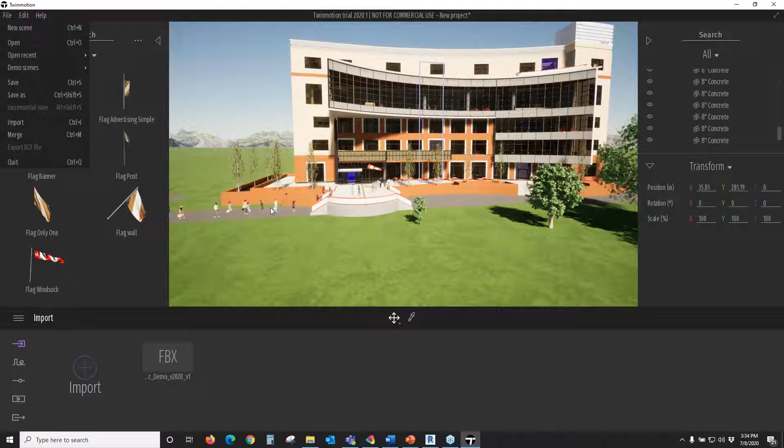I did all the manipulation of the building and the site inside of Revit, and then brought it into Twinmotion. You definitely don't want to use Twinmotion as your way of managing the files. You want to do that in Revit like you normally would, where everything is referenced properly, and then Twinmotion will bring those in very nicely. So yeah, no problem there.

So let me get out of this and show you a couple other things. I don't know, are we on time, or are we okay for time right now? I'm assuming so. Yes, I believe so. People have got to drop off, but yeah, keep going. Okay, let me just show you.

I just want to show a couple things here. I promised I'd show you Twinmotion and Presenter. So this is a Presenter file, the same model that we were just looking at, but packaged as a Presenter file.

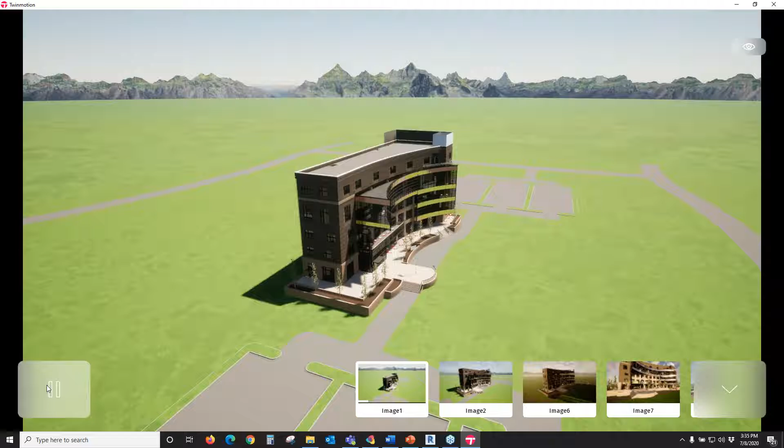This isn't overly extensive. This is a file that you can share with a customer. So if you were the architect working on this model and put together this presentation, what I did is save a couple images. You can run through these like an animation. So there's image 1, you can see it on your screen, it'll switch to image 2 and so forth, walking you through all the various images I've created here.

The nice thing about this is that even though I've embedded these images, and you can have a video embedded here as well, this is the full breadth of the model I was working on. So I can start walking around this as if I own this model, looking through it, walking inside of it, and looking at certain things. So you can share this model with customers or clients or whomever.

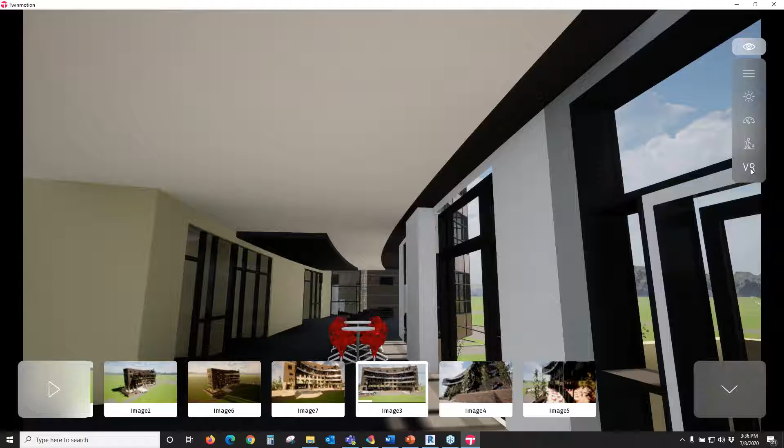Now, granted, they can't change anything about it, and you probably don't want them to, because this is something you're sharing with them to say, here's what we're thinking, what do you think? You'd have all the materials and everything set up, and they can walk around it and look at it. Like I said before, they can go full VR with this. So it's a nice way of packaging something for a customer or client so they can study the models or presentations you have for them. They can't change anything, but they can walk around and get a good sense of what that model is going to look like.

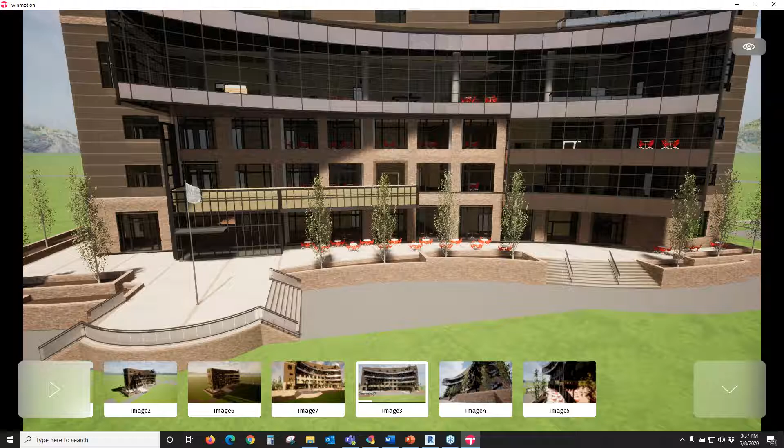Does this run entirely in software, or does the client need certain hardware specs to run a file like this? Well, obviously it's GPU intensive, not so much CPU intensive, so they may struggle with a computer that doesn't have much video RAM. But it's not like Twinmotion where you're massaging the model, you're giving them a standalone file to look at. Still, I'll show you my specs, but you can run this on a relatively weak laptop as well.

Is there a way to adjust the levels of detail when we export, to maybe hit some lower system specs? Yeah, absolutely. You could change the resolution of how these things are exported as well.

There's one thing I didn't show you: Twinmotion determines your hardware and sets up the environment per your hardware spec. So it's intelligent enough to know not to set things at ultra high if you've got a gaming computer versus an average laptop—it'll set the software up so it's not totally taxing your machine, and it'll still run. There is a setting inside Twinmotion where you can do that.

And sorry, because it's related—how does that affect file size with these different resolutions and stuff? I mean, it's relative, right, so the higher the resolution, the bigger the file size is going to be.

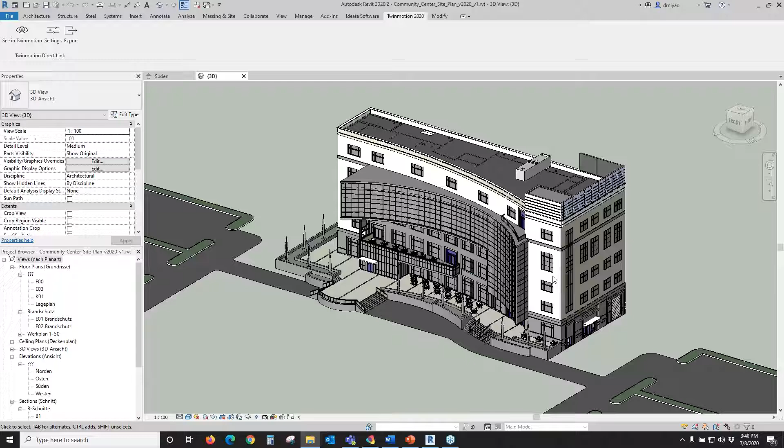It will suffer if you're trying to run it through a web browser. Absolutely. But yes, the preferred workflow is to have them download the file, deliver it however you want, and then they can run it. If they try to run that through BIM 360 or something, it will suffer. So I'm being completely honest with you—I don't want to lead you down the path and say this is going to work great, just put it up on 360 and it'll run flawlessly. But yeah, I'd expect something like this to be a sizable file size. Yeah, absolutely.

One last thing I promised to show you is working with See in Twinmotion. So here's my Revit file—I have one linked Revit file, so the model of the buildings is actually linked to the site. If I was working in my model, still fussing with it a little bit, and wanted to see what this looked like in Twinmotion, it's very simple—I just click on See in Twinmotion.

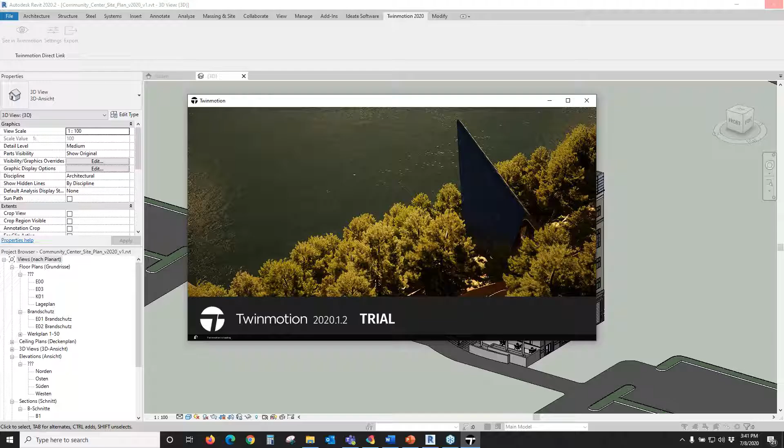And it will open up Twinmotion, opening it up in a new project. Here's my welcome screen again, and it'll just take a minute. So here's my model, for instance—let me just fly into this very quickly. This was the model that was just right out of Revit that I'm bringing in very quickly to look at.

By default, because of the way I had my settings, it automatically swapped out these RPC trees with the Twinmotion trees. What you can do here—I'm sitting in Twinmotion looking at this model—if I go back to Revit and maybe do something silly here... I don't know if I can do this.

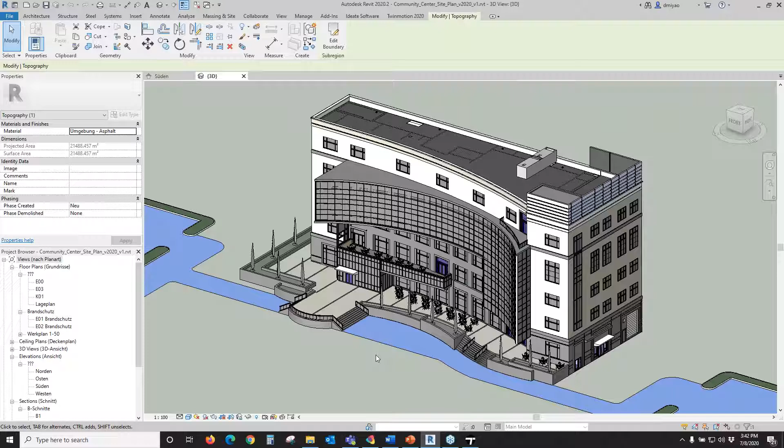I'm in the wrong model. What I want to show you is that I can manipulate this model, re-export back out to Twinmotion, and it will automatically update that change inside of here without fussing or re-exporting. I'm directly viewing this model in Twinmotion very quickly. That's basically how View in Twinmotion works. It's a good way, as you're working with your Revit model, before you go to full export to FBX, to vet out your model and make sure everything's lining up the way you want. So that's the long and short of exporting it and seeing it in Twinmotion. It's very quick because it's a linked model.

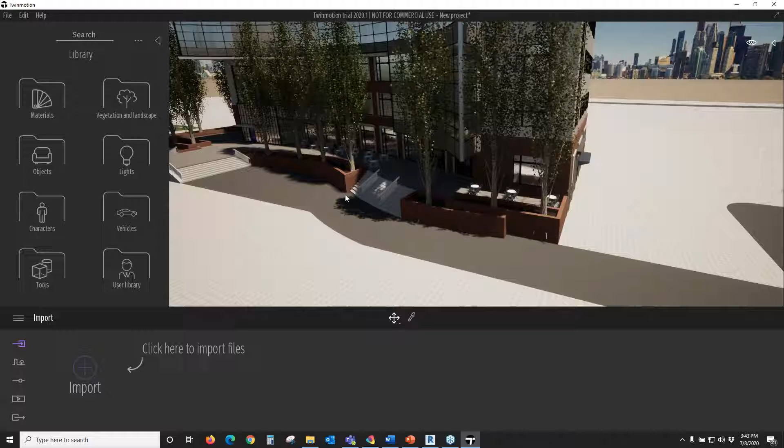So you're saying if you move a tree, it'll connect? Exactly. I can manipulate this model, re-export back out to Twinmotion, and it'll immediately show me that change here. And like I said at the beginning, the changes you make in Twinmotion do not go back to Revit. It's one direction.

Quick question, kind of tangentially about placing trees again. If we were to need specific species for our trees, but we didn't want to get too deep into the nitty-gritty of making the models, can we place RPC trees in Twinmotion? Yeah, absolutely. Once you have whatever specialty trees you want, you can place them in. Great, thank you.

Hey Dean, one of the things I think regarding content was that there's a new partnership with Quixel. Yes, correct. And there's tons of content there, right? Oh, there's tons of material, a whole material library. In fact, there's a variety of other sites you can download from. Like for instance, about the trees, there's a library full of trees that you can import. Absolutely.

Let me just go back to this PowerPoint very quickly, because I think there are some additional points — we kind of walked through this already.

Basically it's a very easy product to use, as you saw. As you start touching the commands and playing with it, you'll see it's very easy to use, and as you get deeper into it, you'll discover on your own the learning of what you're able to do. It's not like 3D Studio Max where it's very intense. You can produce renderings and animations very quickly, in the same day, without intensive training. So very easy to use.

I think it was helpful that it was interactive, so I was able to answer questions as we were getting through things. Was there anything else, Matt, that I needed to share with the group?

Well, I just want to reiterate that it's a perpetual license, so if you purchase Twinmotion, it's a perpetual license. They can't turn it off like the new subscription model that Autodesk has, and you're going to get every update and release through the end of 2021. That's a good amount of time where there's no maintenance or subscription additional cost to stay current. I know Twinmotion has a minimum of 3 point releases a year, and they're constantly updating this product.

Do they offer network licensing? Do we have to buy a seat for each person? Is there no way to buy, like, 5 seats and have it shared between a lot of people? No, it's a single user license, and each license is a whopping $224.

That's not $2,224, but $224. So most firms can afford to at least give the power users the ability to use the tool. That's a promotional price through the end of August, but it's quite the deal. Hopefully you can see how easy this is to use and ramp up very quickly.

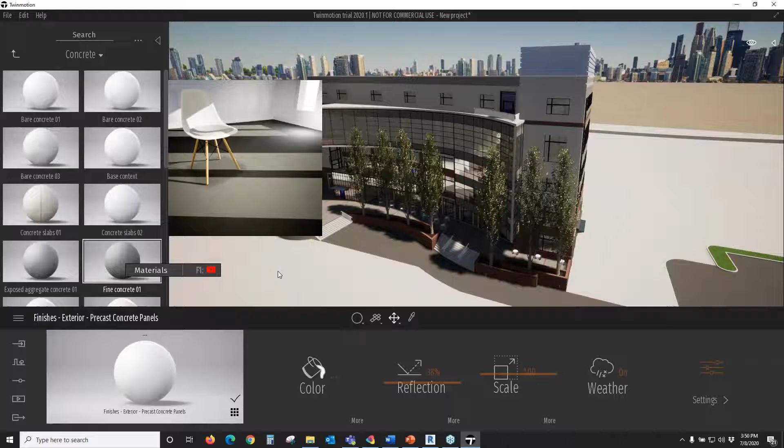So if I wanted to change that material to something else, I can just put it on just that surface, not the whole building, even though it's the same material. It's just a toggle right here: apply to object versus apply to the whole object.

By default, when we bring in and replace materials, we have to set up the scene in either SketchUp or Revit with the materials predefined and organized that way. When we come in and apply it here, it applies the material to all objects of that material type.

This is a great way to get around that, because you can isolate an object, even though it was applied a specific material, and say I want it to be different. That's the one thing I really, really like about this.

Can you split surfaces? I'm not having to go back to Revit or AutoCAD or SketchUp and separate out that object so I can apply a different material to it. I can do it here. Very cool.

Sorry, can you split surfaces? I can't, you'd have to do that physically in Revit. However you want to separate out your model in Revit, do it there, and then bring it in here, and I can massage things as needed.

That doesn't seem like too big of a hurdle because you can use the View in Twinmotion plugin. Oh yeah, that's what I'm doing right now, just looking at it and going, okay, how does that look? If I do this to it, what's it going to look like? You'll know right away if you need to separate that out for whatever reason. That's the beauty of doing that in sync with Twinmotion.